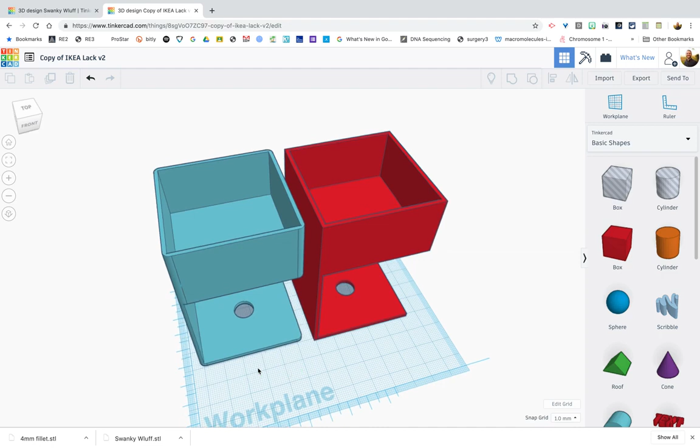Well, hello. I wanted to take just a couple of quick moments to show you how to accomplish something known as filleting corners in TinkerCAD. Now, TinkerCAD is great because it's free, it's accessible, it's usable on student devices like Chromebooks. It does not require a software package download or installation, no administrator passwords, those sorts of things.

However, because it's free and because it's web based, it does have limitations. And one of those limitations happens to be the ability to take hard corners, like you see here in the red object, and round them off, like you see in the turquoise object next to it here on the left. Now, why are rounded corners important?

Well, there are a few reasons that I'm aware of. The first is aesthetics. Some people prefer round corners as opposed to hard corners. The second reason is strength of changes of plane on an object.

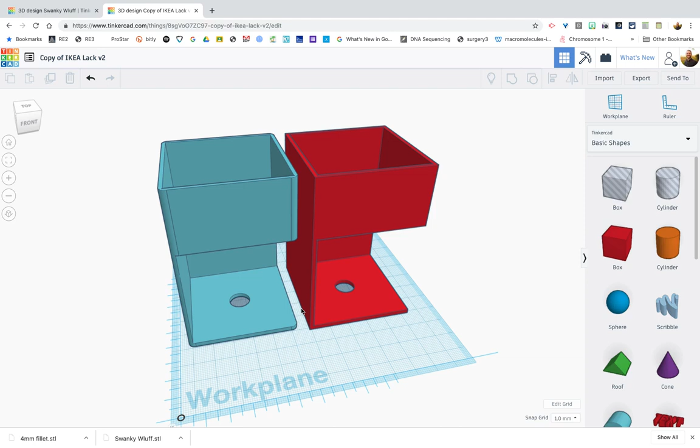So anywhere you have something like a right angle, like you see in the object on the right here in red, anywhere you have a change of plane, you could potentially have a weak point in your object.

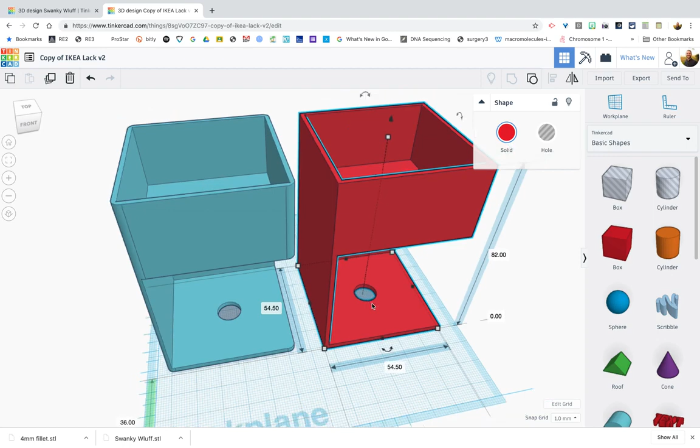And then the third, which is what's kind of led me down this rabbit trail of trying to figure out how to round or fillet these corners, is safety. Plastic can be very sharp. If it's printed at right angles or more acute angles, it can be extremely sharp and dangerous if, say, a 4-year-old or a 2-year-old in your house were to happen to trip and bump their head off of an object like you see here. Now, what you're looking at are some table couplers.

If you look at the project title here, what these couplers do is, without having to purchase any additional hardware, these connectors allow me to attach 2 or 3 IKEA Lack tables, one on top of the other. And then I don't have to worry about them shifting or sliding off of each other. And what it essentially creates is a nice shelving system, which I'm planning to use for my office printer, my 3D printer, and my Cricut vinyl cutter.

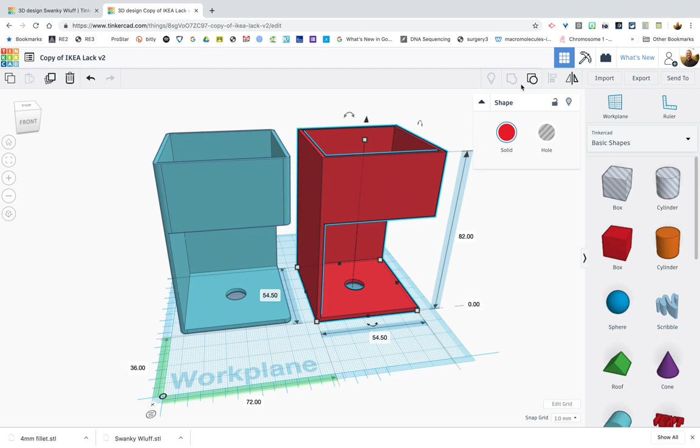Okay, so I designed my base item. If I go ahead and ungroup this real quick, I can kind of give you a sneak peek. I designed my base item, which was just basically an empty box sitting on top of another more complicated box with a hole cut in it. And then I just grouped those two items together.

But the hard corners were still bothering me. And so I did come up with a way to round these corners off, or fillet them. I'm going to use the term fillet from here on out in this tutorial. Okay, so to show you how to do that, I'm going to jump to a blank workspace.

Okay, and the first thing that we're going to do, we're going to use all basic shapes here, and we're going to create a fillet tool. And so what you might want to do is just go ahead and name this, I'm going to name this 4mm fillet tool. And I'm just going to keep it in my TinkerCAD library permanently.

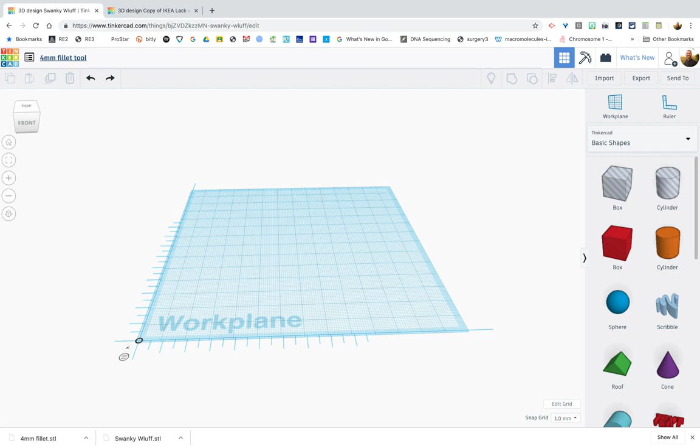And I can always go back and I'll show you how to do this later, but I can export this object once it's complete as an STL, and then I can import it into other projects and use it to fillet corners, which is quite cool. So I'm going to start with a basic shape.

I'm going to use the roof shape. And the only thing that I'm going to do with the roof shape at this point is I'm going to go ahead and stand it up on its end by rotating it 90 degrees. Okay, and then if you'll look here, you can see it's sitting at -5, so it's sitting underneath the work plane.

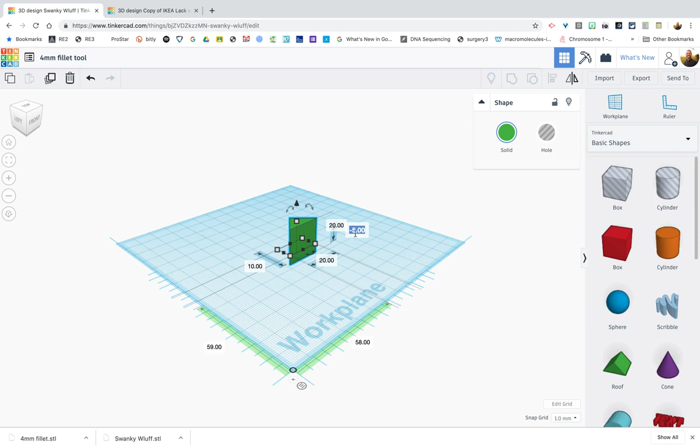I actually want to bring it up out of the work plane. There's two ways to do that. You can use the cone, just click and drag, or you could just set this to 0. And that's going to drop it nice and flat on the blue work plane here. So that's the first object that we need.

The second object that we need is a cylinder hole. So we're going to bring this cylinder hole out. We can see that it's 20 millimeters wide, as is the right triangle.

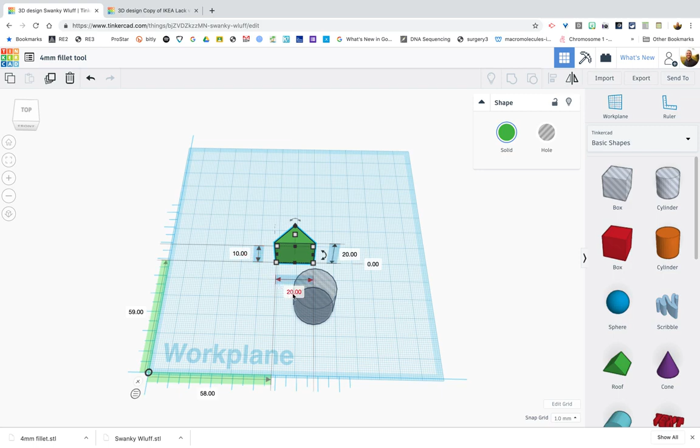Now, it's very, very important that you don't change the dimensions of this triangle unless you do so in a 2-to-1 fashion. That is, 2 increments wide by 1 increment high. Extremely important that we maintain this right angle right here. Okay, and you'll see why a little bit later in the video.

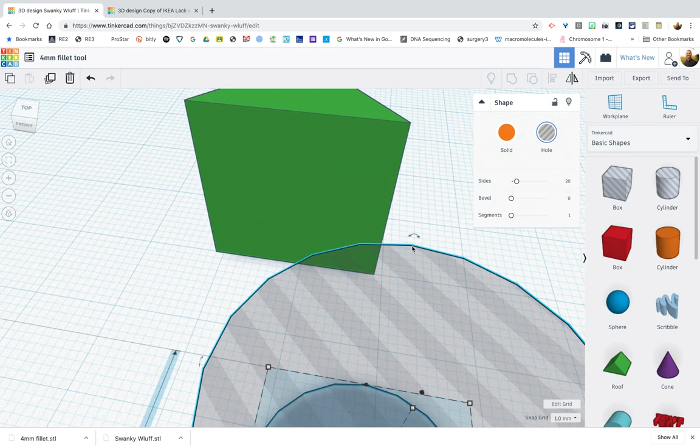Okay, so while I'm zoomed in, I do want to draw your attention to the fact that when you drop a cylinder into a workspace in TinkerCAD, you see it's just a bunch of tangent lines connected together to form what essentially looks like an arc, or a circle.

What we want to do is, by clicking on our cylinder, we actually want to increase the number of sides of that cylinder to as many as TinkerCAD will allow. Okay, so in this case it's 64.

All right, so the next thing we're going to do is align these shapes to each other. There's a couple ways of doing this. We're going to click on one, hold down the shift key, and click on the other. That allows you to be very selective. Let's say we had 5 objects in our workspace and only wanted to select these 2 — holding shift and clicking the ones you'd like to select is a nice way of doing that.

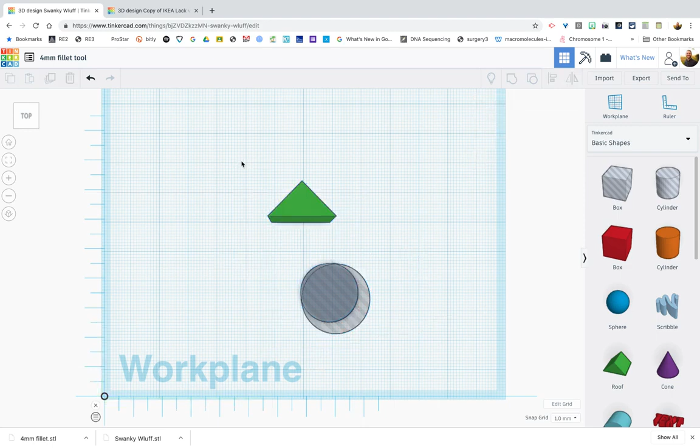Now there are other ways. We only have 2 objects in our work plane, so I could use Command A on a Mac or Control A on Windows or a Chrome device, and that'll select everything in the work plane, or you can simply click and drag over top of the items you want to select.

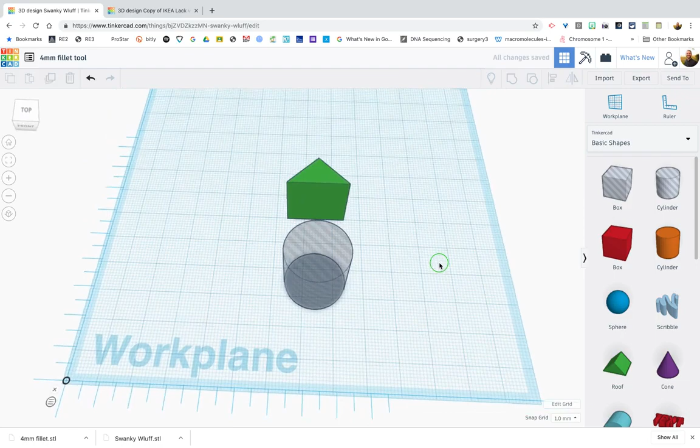So we want to use our Align tool here to only align them center with one another. We're only going to click this little button here — we want to align them center with each other. That's the only way we want to align them for the time being.

Now what we're going to do is use this circular hole to cut some of this material out of the triangle, but it's not going to be perfect — we'll have to come back and touch it up a little bit. So we're going to click on the work plane tool here and bring this out to our workspace, and you can see it's sitting flat on the blue work plane right now.

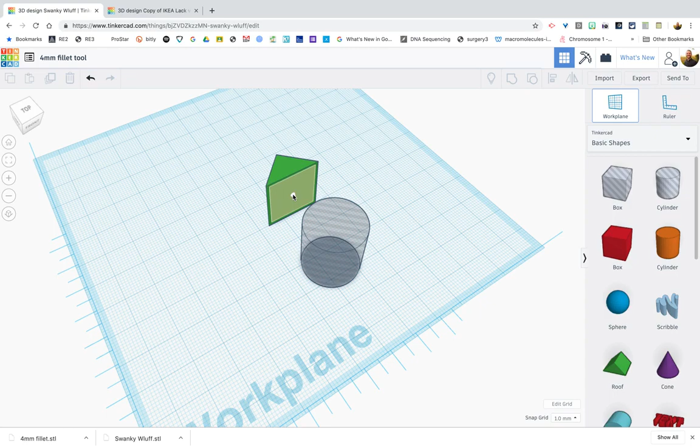Now, if I put it up against this cylinder, you can see it rotates around the faces of this cylinder. We actually want to put it on what was the bottom of the roof. And watch what this does — it's going to change our reference plane to the bottom of this roof, or this triangle.

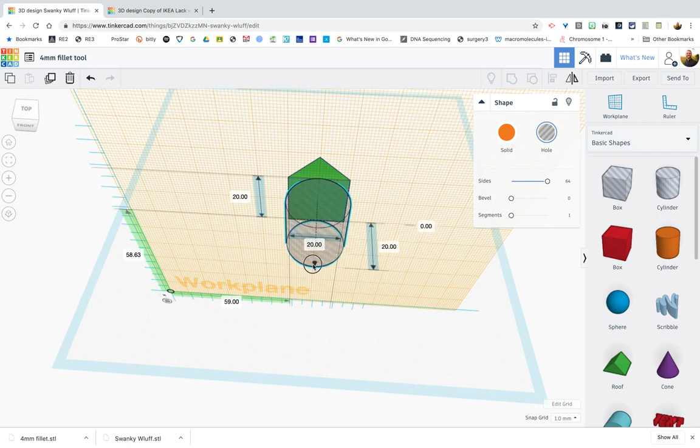So what we want to accomplish next by clicking our cylinder hole, or selecting it, is we actually want to sink that cylinder. You can see I grabbed this — I call this the cone right here. We're going to grab this cone handle and push, or sink, that cylinder down into this roof. And that's -6, right? You see this reading right here. -6 looks pretty good to me.

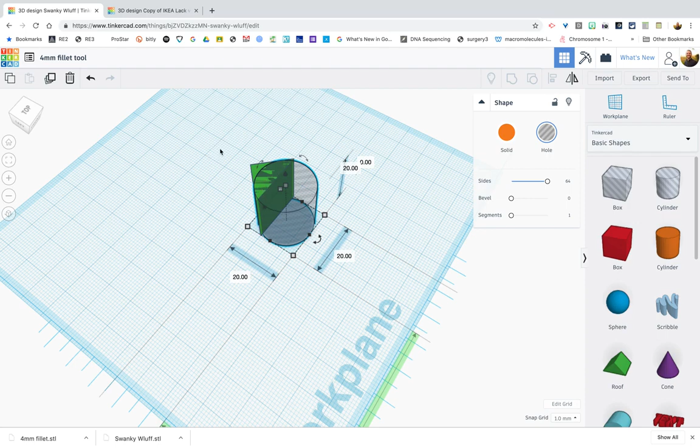So I'm going to go ahead and switch my work plane back to the original blue work plane. Now we haven't cut this positive material out yet, because what we need to do is take these 2 objects and group them together.

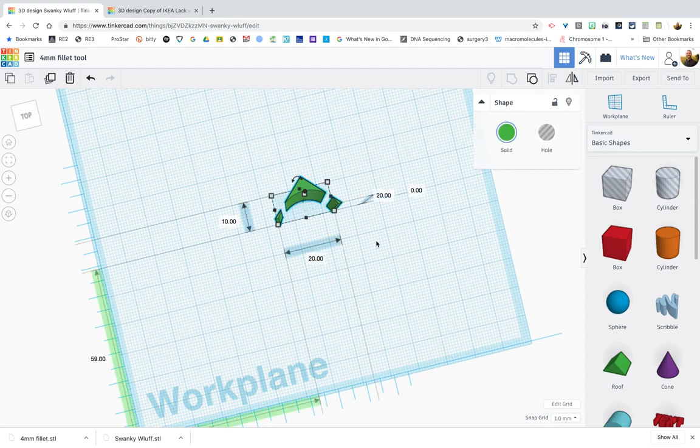Now you'll see, as I told you, we're a little bit imperfect here. You can see we have 2 pieces of this roof, or the triangle, still left over. Now it's not as easy as clicking on one of those pieces and hitting delete or backspace — it doesn't work that way. If you do that, it's going to delete this entire piece, all 3 pieces here.

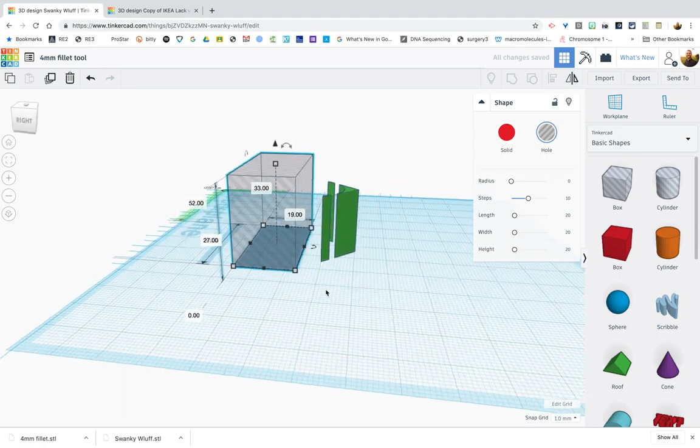So what we have to do is use another hole in order to get rid of those pieces. So we're going to bring a box hole out and increase its width and its height so that we know we're catching all of this excess here.

And because I'm annoyed when things aren't aligned — this isn't necessary, but I'm going to go ahead and align my box hole and what remains of my roof. I'm just going to align them center.

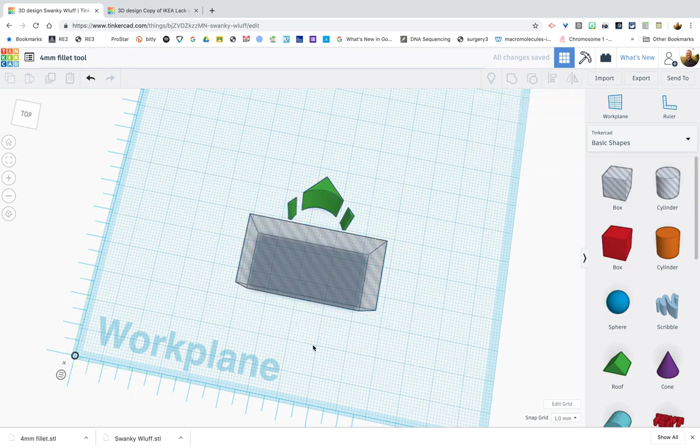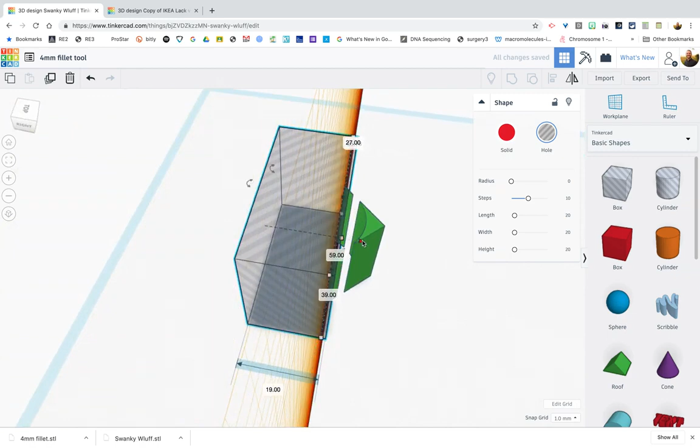And then we're going to come back to the old work plane tool and set it right here on the flat remnant, which was the bottom of the roof. And we're going to take this box and sink it into this work plane enough so that we get rid of these 2 remnants of the roof, but none of this — we want to keep all of this intact.

So let me grab my work plane tool. We'll go back to the original blue work plane. We'll select all and group those together. And now we've gotten rid of those remnants, and what you're left with here is the piece that you want to keep.

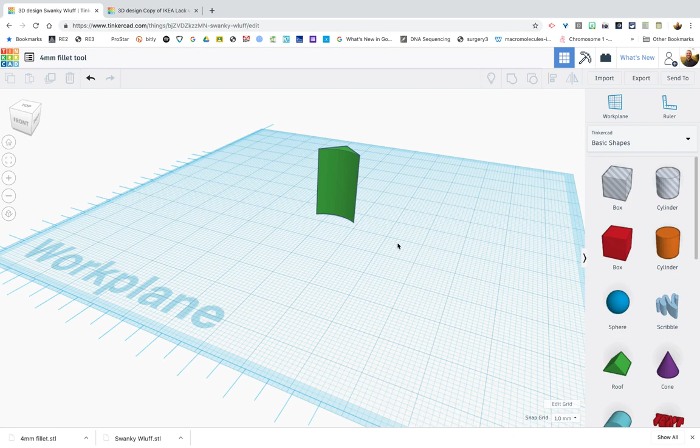So this is now going to be your fillet tool, and I'll show you how it serves as a fillet tool in just a minute. We're going to go back to that IKEA project I was working on. So the beauty of this is we now have a scalable piece.

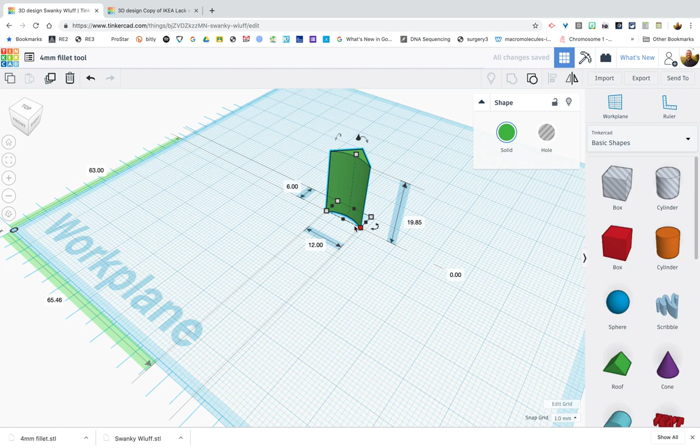If you hold down the shift key on your keyboard and grab one of these corners and drag, you can make as big or small of a fillet tool as you'd like. So I'm going to go down to about — what did I do here, I think I goofed something up. Let me redo. Click. I'm going to hold down shift and scale this down to about 4-ish millimeters if it'll let me. We'll go 4, we'll go 3, there it was, 4. All right.

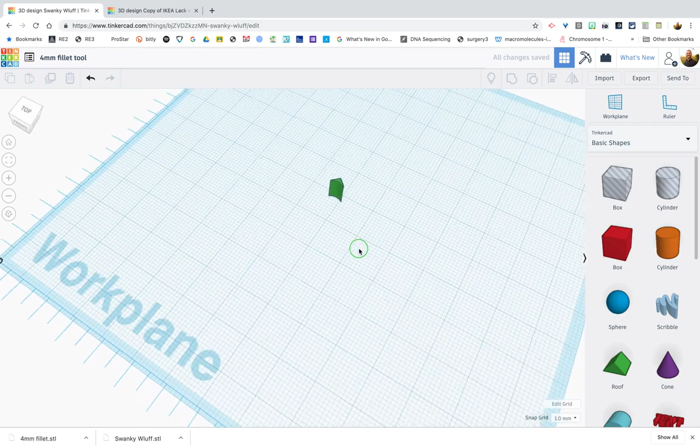So if I look on top, it's nice and uniform. The arc's nice and uniform. We've maintained our right angle. What I can do is actually make this taller without proportionally scaling it out.

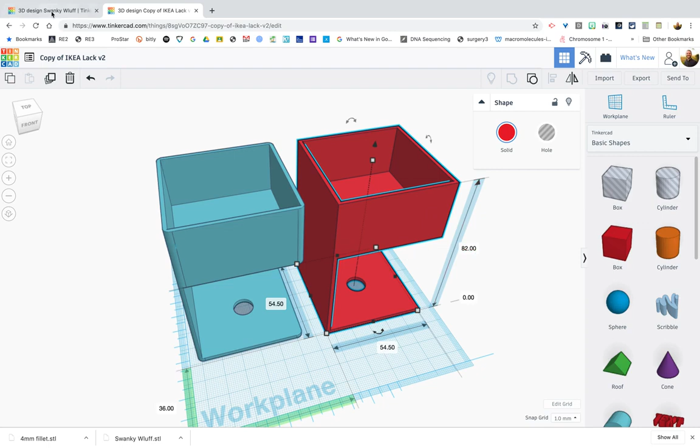Let me jump back to my other project here real quick. You can see the overall height of this connector is 82 millimeters. So why don't we go ahead and make this 84. We're going to oversize it because we want it to sit above and below all of the positive space that we want to delete in the project.

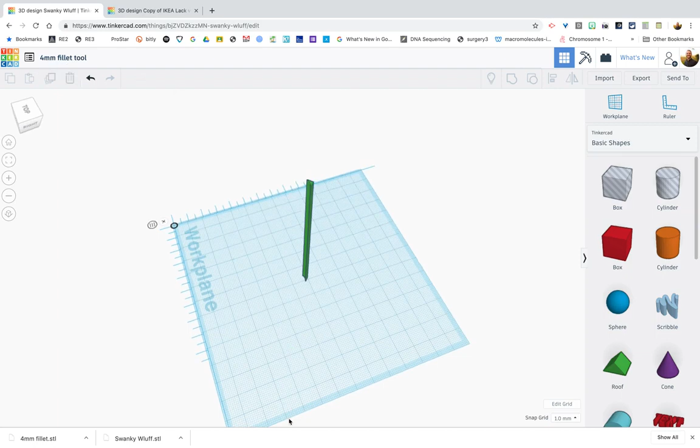We're going to call this, as I've already done, the 4mm fillet tool. We'll leave it just as is, and go ahead and export it as an STL.

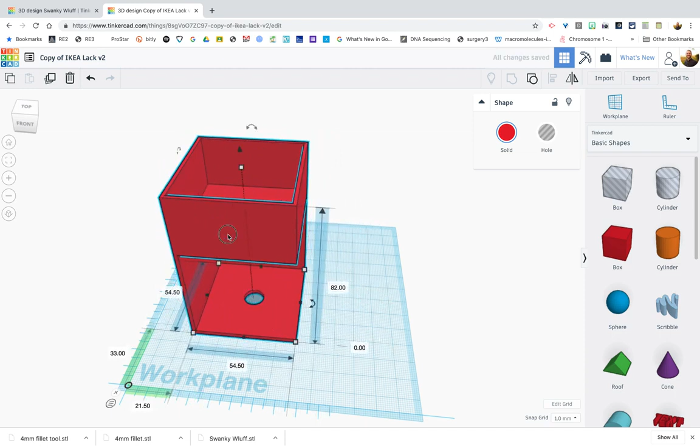Now, if we come into our workspace, I'm going to do us a favor and delete this object so there's less jamming up the Workplane here. And I'm going to rotate this around so that we're looking at this back corner. This is the most important one for me to fillet on the whole project because it's going to be the most exposed corner, the most exposed spine of the connector.

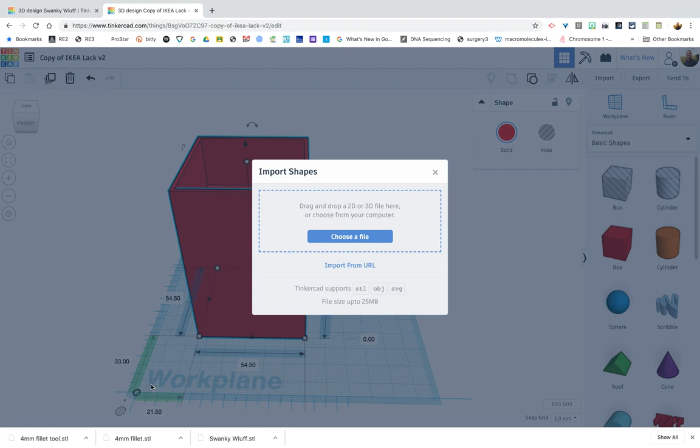Now I'm going to import this 4mm fillet tool that I just created. We want it scaled to 100% because we know our dimensions were the same. You can even check them down here. It's 2:4, there's that 1:2 ratio. It's 84 high, and we're going to click import.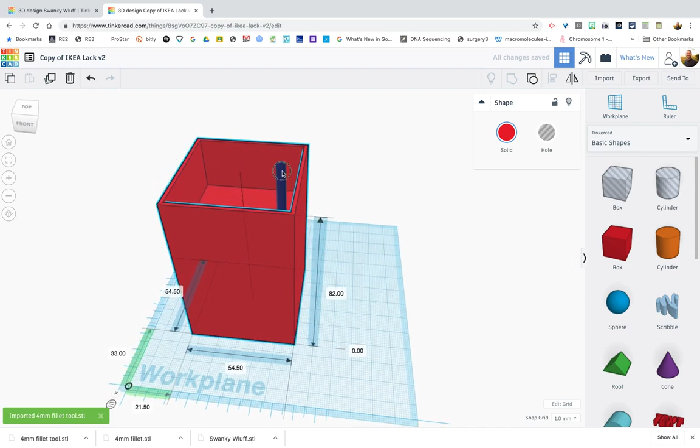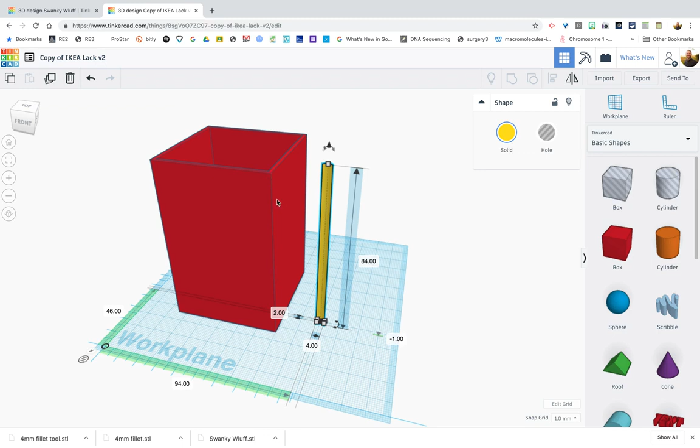Of course it's going to drop it right inside of the box, so it's not easily visible. Now that we've imported it, you can see it's sitting 0 relative to the blue plane. All I want to do is drop it -1 millimeter below. So this purple object—I'm going to change the color so it's easier to see—is going to sit 1 millimeter below the 0 point and 1 millimeter above the highest point, because remember, we made it 84 and this is 82.

So now what we have to do is hold down shift and rotate this so that these corners are the same. You see that? Now here's the trick.

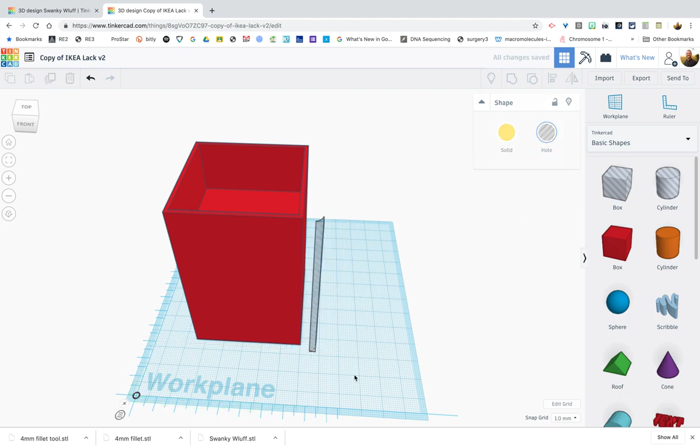Once rotated, once resized, once adjusted, what we actually want to do is take this solid object, which is yellow, and turn it into a hole. Because what it's going to do is subtract from positive space. Then we're going to click on it, click on our container, and use our align tool, back corner, back corner.

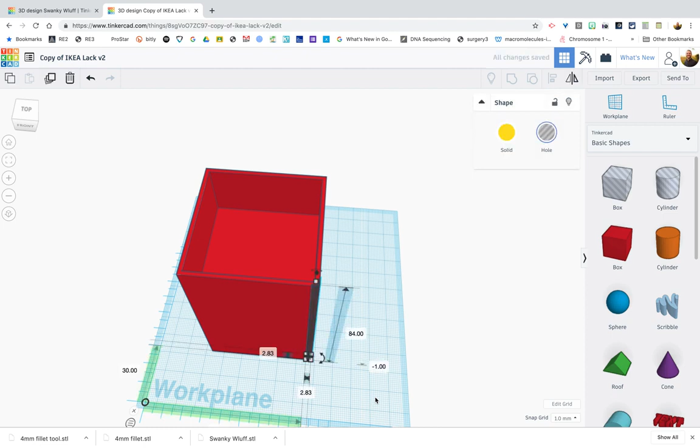We're going to do a quick check to make sure it's going to cover all that space. And before we do that, because we have 3 other corners that we probably are going to want to fillet too, we're going to duplicate this using the Command D keyboard operation. That duplicates that item.

Because what I'm about to do is group it and round that corner off. Check that out—so we now have a round corner as opposed to a hard corner.

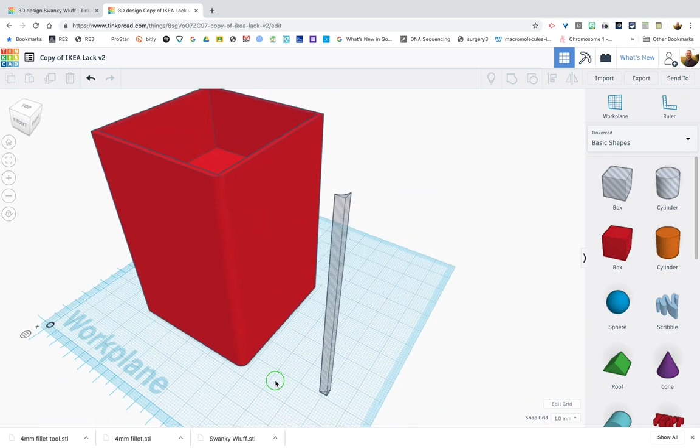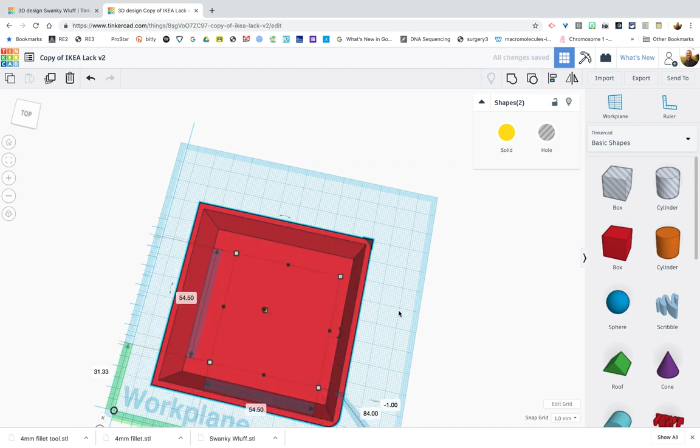So if we come up here, it's obviously not going to work because we've got to rotate this around and then align here and here. Same thing—we're going to go ahead and group.

Oh, what was my mistake? I didn't duplicate it before I grouped it, therefore I didn't have one to use on my next corner. So I just undid and duplicated there. So let's group.

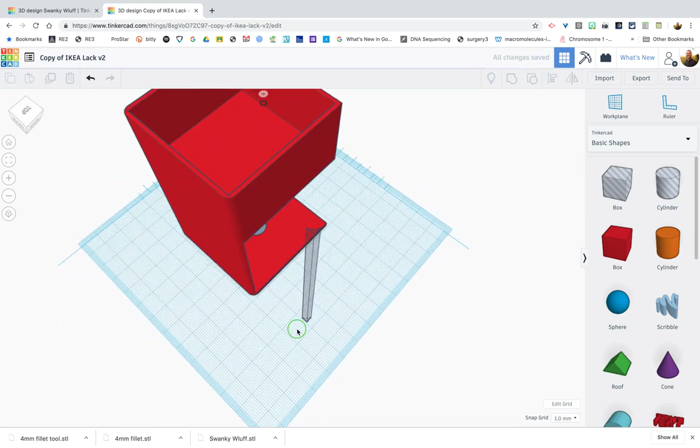And you guessed it, we've got to rotate this one again. We're going to align here and here. Nope, couldn't see it there. We're going to align—there we go, here and here.

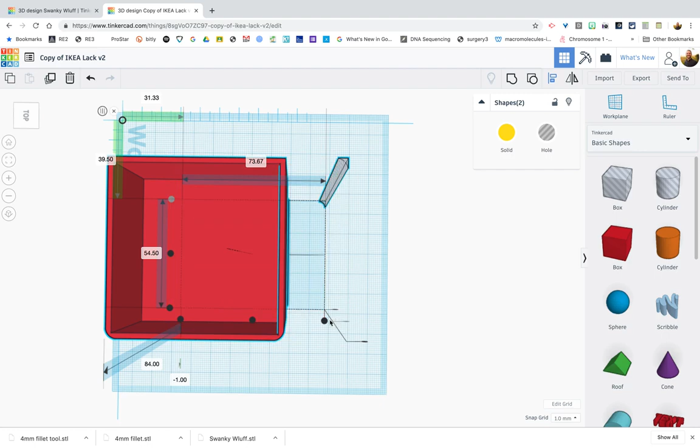And before I group, I want to duplicate—Command D, or Control D if you're on a Windows or Chrome device. So I want to select these two and group them together. Last but not least, we'll hit this last corner and we'll be done.

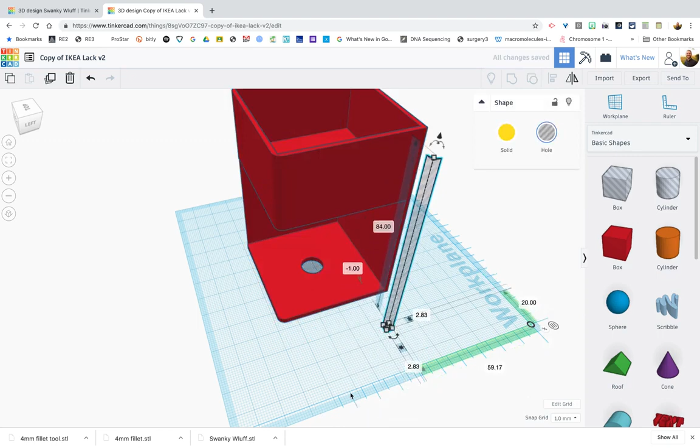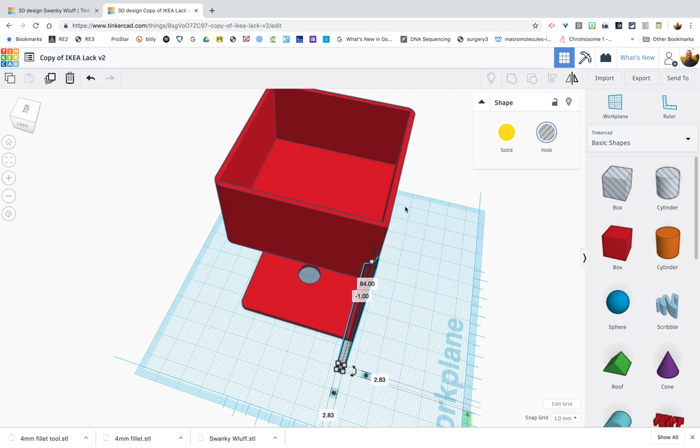I have found that grabbing this rotate handle is difficult sometimes. Again, this whole filleting process is so much easier in Fusion, but not everybody has access to Fusion. So, there and there—we don't need to duplicate that one because we are done.

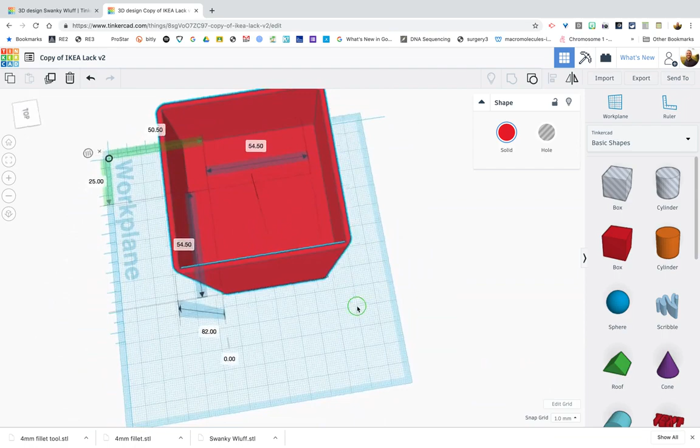So there you go, we've got a nice round piece to use as a connector. I don't have to worry about taking my kids to the emergency room if they fall and crack their head off of it, because it now has a nice round filleted corner.

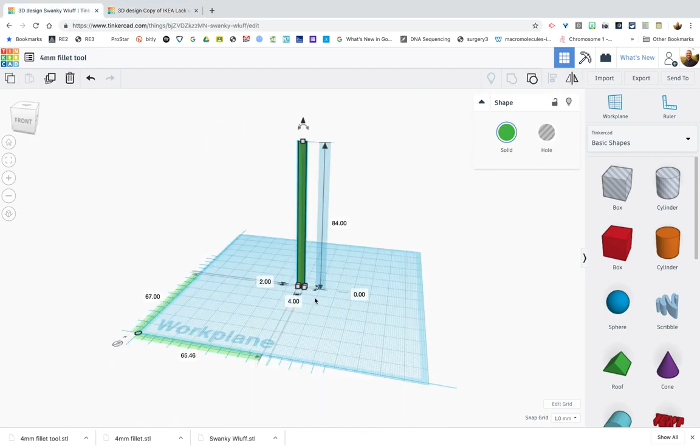So that is all, hopefully that was informational. Hopefully you've got a bunch of fillet tools saved in your library once you learn how to do this. Or you can just use this one and scale it on an as-needed basis by holding down Shift and dragging one of the handles. So that is all, hope this was informative. Thanks for your time.